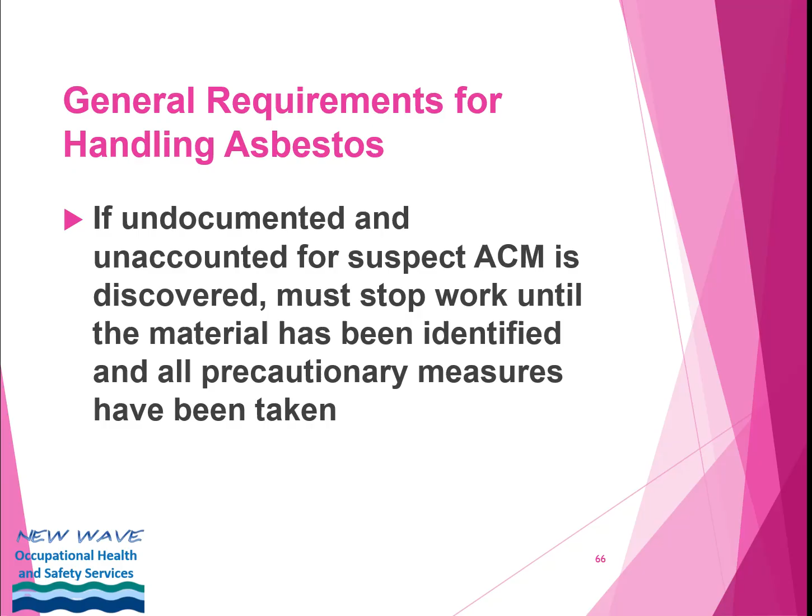Also, when doing asbestos work in a building with a ventilation system, turn off the system and seal the openings till the work is complete. The last thing you want to do is to get asbestos inside the ventilation ducts and machinery.

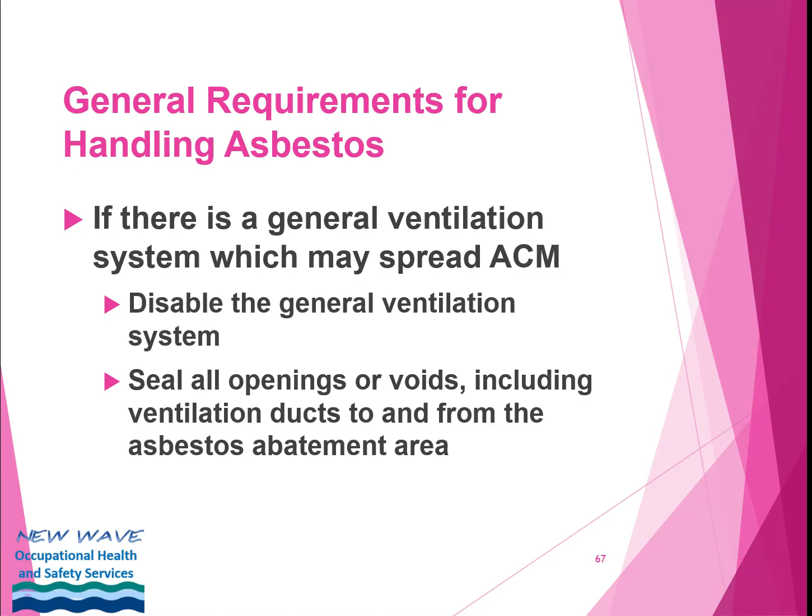Lastly, asbestos activities in general will require a changing and washing area. While this can be a washroom, you must consider the decontamination aspects of this room. Thick plastic drop sheets will also often be used.

And asbestos handling is a very wasteful process. Any drop sheets, barriers, portable enclosures, essentially anything used to contain asbestos, must not be reused unless they are rigid and can be cleaned thoroughly.

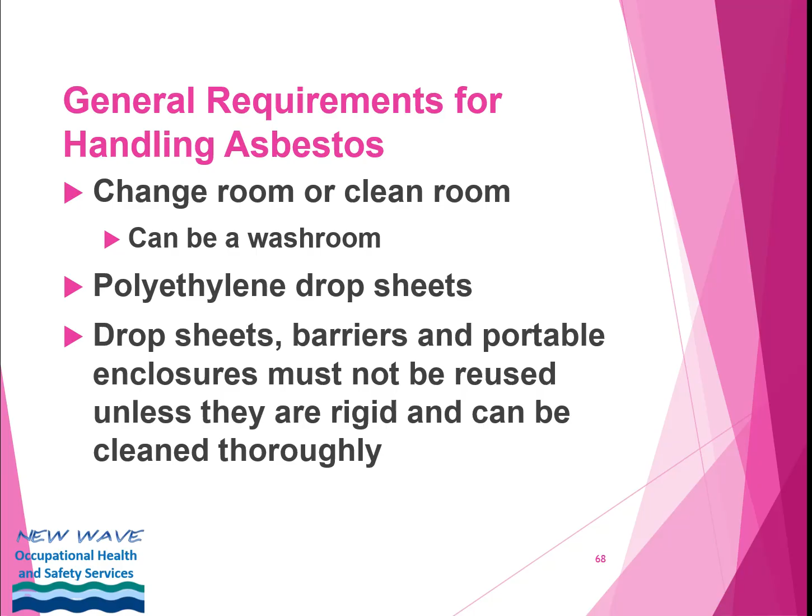Those general rules aside, there are many different ways to classify asbestos work. Ontario uses a Type 1, 2, 3 classification, as does Manitoba and Prince Edward Island. Alberta, British Columbia, Saskatchewan, New Brunswick, and the federal government use a low, moderate, high risk scale. These two systems follow the same idea and differ only in details. The other provinces do not classify asbestos work according to risk.

As this is an awareness course, we will not be getting into the fine details of these classifications. However, for illustration purposes, we will highlight some of the rules from Ontario, as its Type 1, 2, 3 system is widely used. In this way, learners can gain appreciation of the activities and their risk levels.

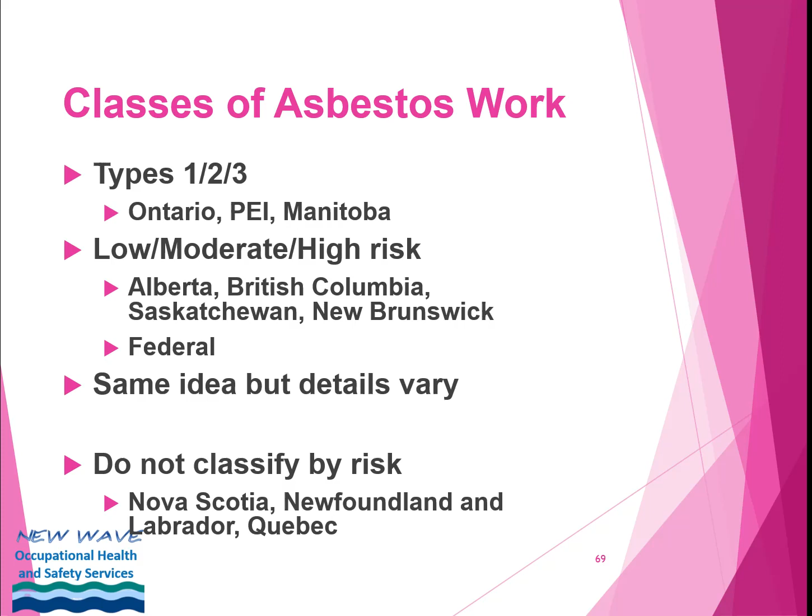To make this discussion more understandable, I want to introduce a new term. The Ontario rules often refer to breaking, cutting, drilling, abrading, grinding, sanding, and vibrating asbestos. To make the following discussion a little easier to follow, I will refer to all of these actions as simply working. And for simplicity, I will refer to asbestos-containing materials as simply asbestos.

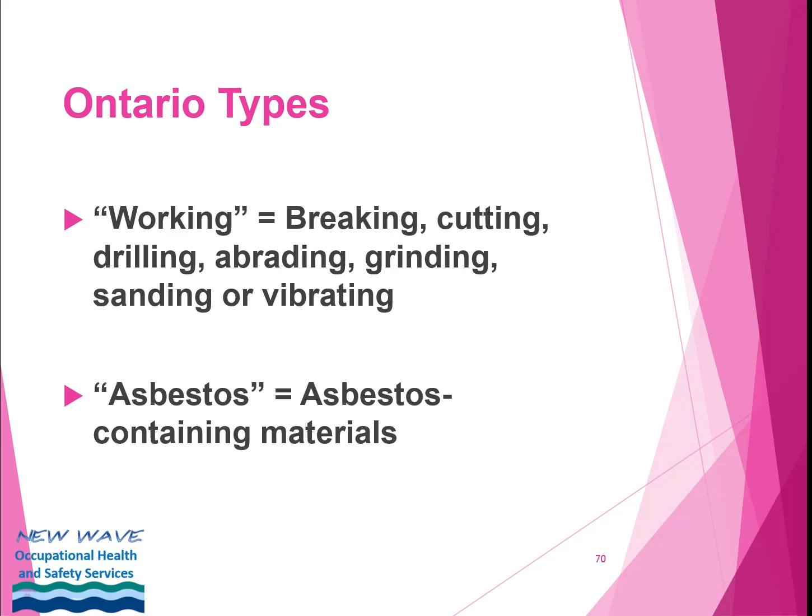Now, Type 1 activities, called low risk in other provinces, have the lowest potential for asbestos exposure. These activities include removing less than 1 square meter of drywall when asbestos joint filling compound was used, or installing or removing less than 1 square meter of friable asbestos ceiling tiles, so long as you do not work them.

Look at other materials other than ceiling tiles. If the asbestos is non-friable, then any amount can be installed or removed, again, so long as you do not work them. And you can work any amount of non-friable asbestos, such as floor tiles, so long as you use non-powered hand tools and wet the material first. All of these activities are Type 1, or low risk.

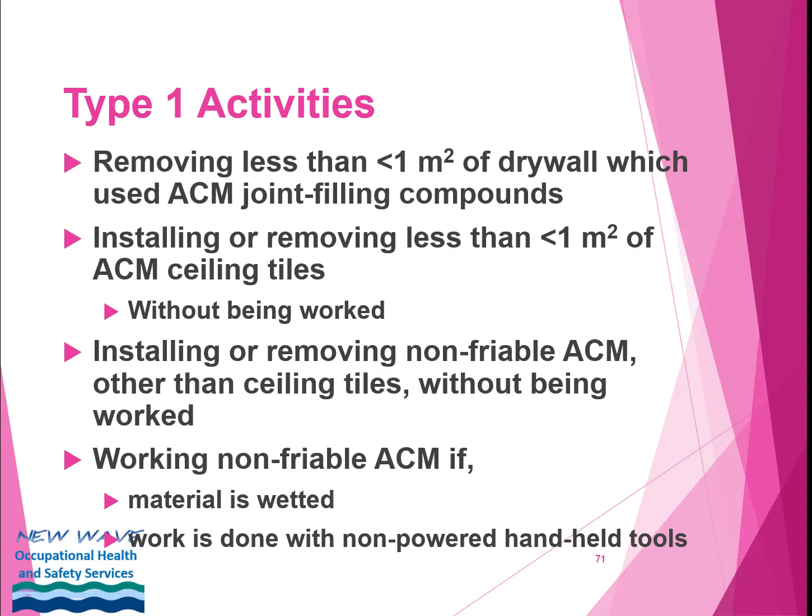Type 2, or moderate risk, is the largest list of activities. Here you can remove or install an unlimited number of ceiling tiles and amount of drywall. It is also here where you can remove false ceilings upon which asbestos may have fallen. For instance, ceilings below girders that have been sprayed with asbestos fire insulation, as small amounts of this insulation often falls off. Type 2 also includes disturbing less than 1 square meter of asbestos during machinery repair.

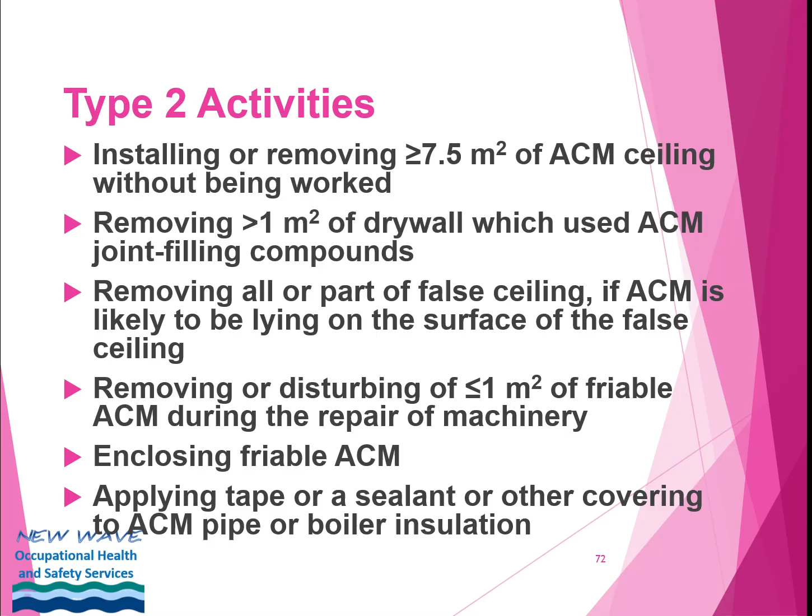And recalling our discussion about asbestos handling options, enclosing friable asbestos or covering asbestos insulation with tape or sealants are also Type 2. In Type 2, you can even work non-friable asbestos, such as asbestos wallboard, so long as you either wet the material and use non-powered hand tools, or use power tools that are attached to HEPA filters.

You can clean or remove air filters that may have trapped asbestos dust, and remove pipe insulation using a glove bag. Lastly, there is a catch-all. Any activity that is not explicitly listed in any type is included in Type 2 by default.

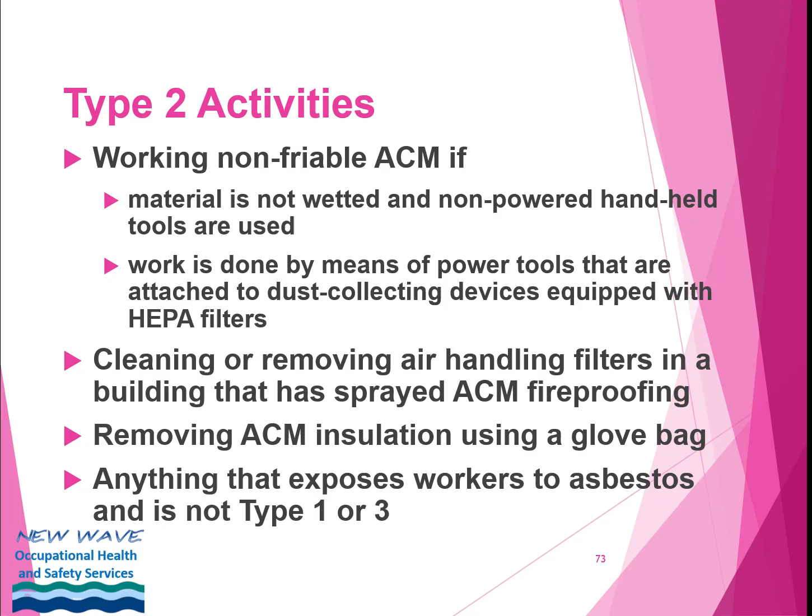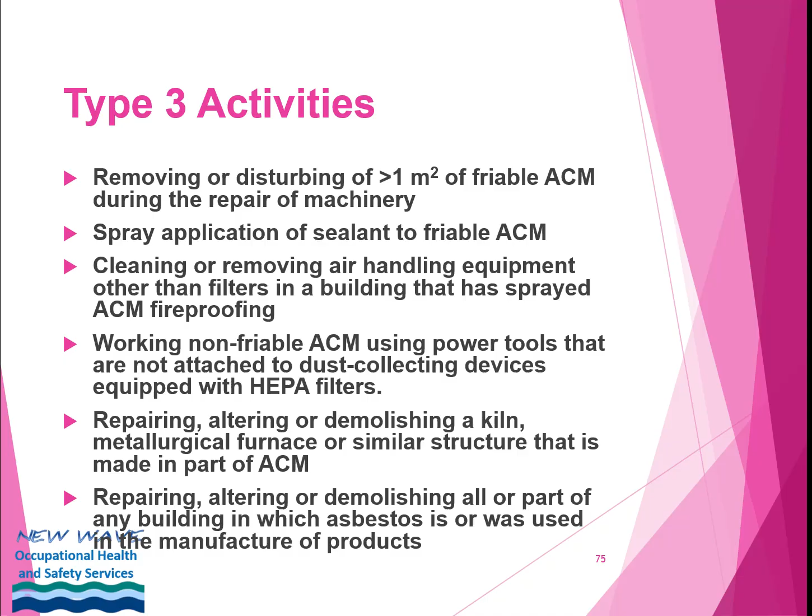Type 3 activities carry the highest risk. Here you can remove any amount of asbestos during repair. You can apply sealants or encapsulants, and you can maintain all parts of air handling equipment that may have been exposed to asbestos. You can use power tools to work the asbestos, even though the tools have no dust collection systems. And you can repair, alter, or demolish buildings or equipment that was used or contained asbestos.

I want to add one note here from my own experience with asbestos removal projects. I've seen contractors quote Type 3 precautions for Type 1 or Type 2 activities. Most commonly, these are removing floor tiles, which is Type 1, or removing drywall, which is Type 2. While the Type 3 procedures are quite safe if followed, they increase the client's costs unnecessarily.

Also, while billing for Type 3 precautions, I've rarely seen contractors build or use these precautions properly. It thus falls on the building owner to be alert to what is needed.

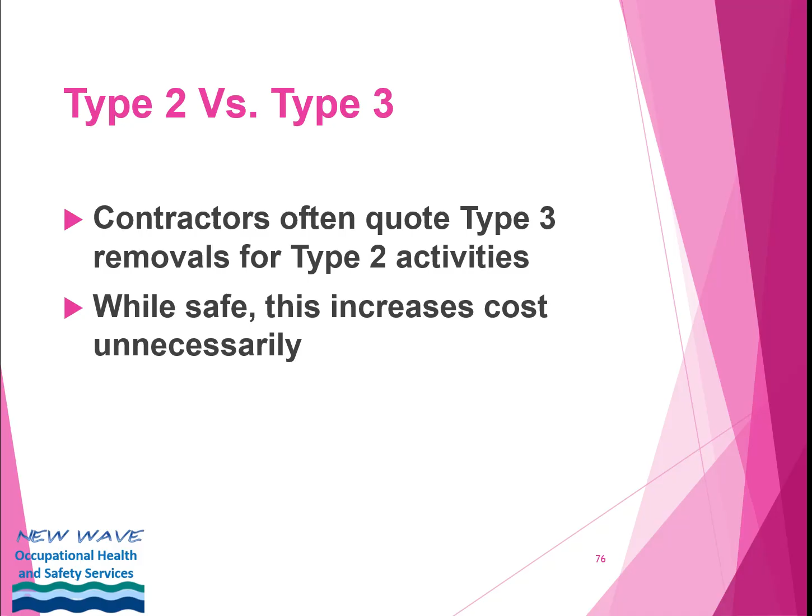We have noted that Type 1 activities are the lowest risk, so what precautions are needed to manage these low risks? Beyond personal protective equipment, which we will discuss in the next module, you will need a water source so that the asbestos can be wetted, and so that workers can wash up afterwards. The workers will also use plastic drop sheets to cover the floor, and need special waste disposal bags. Beyond that, no barriers or containment systems are needed.

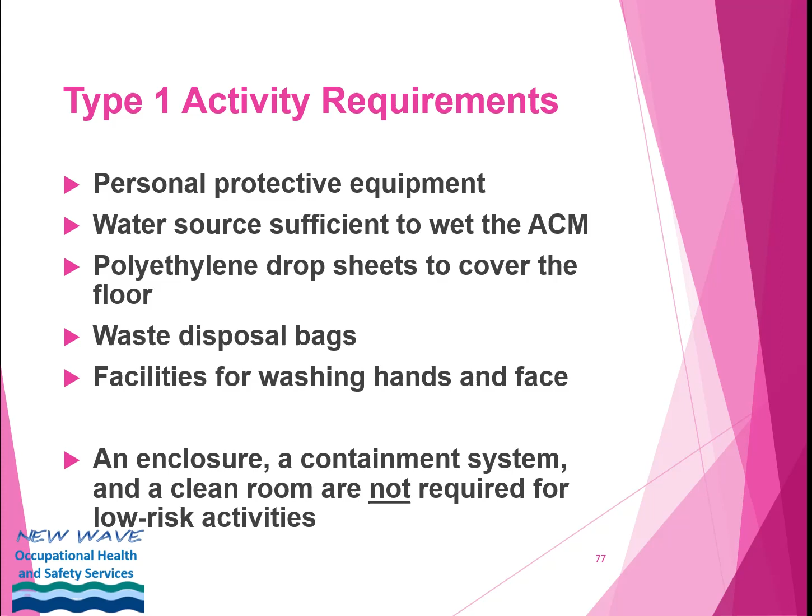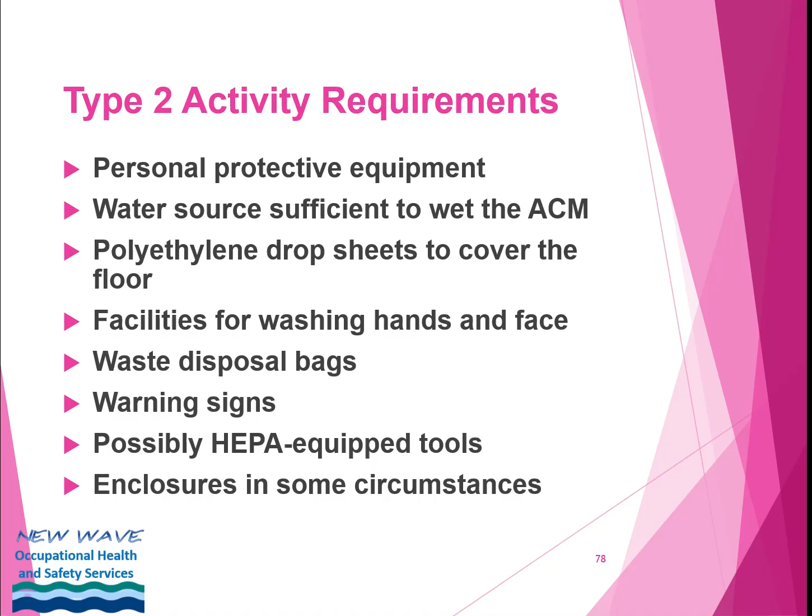Type 2 activities carry on the Type 1 precautions, but add warning signs and possibly HEPA-equipped tools and enclosures. Recalling from our recent discussions that working non-friable asbestos is a Type 2 activity if using power tools that are attached to HEPA filters, this video illustrates what Type 2 precautions actually look like.

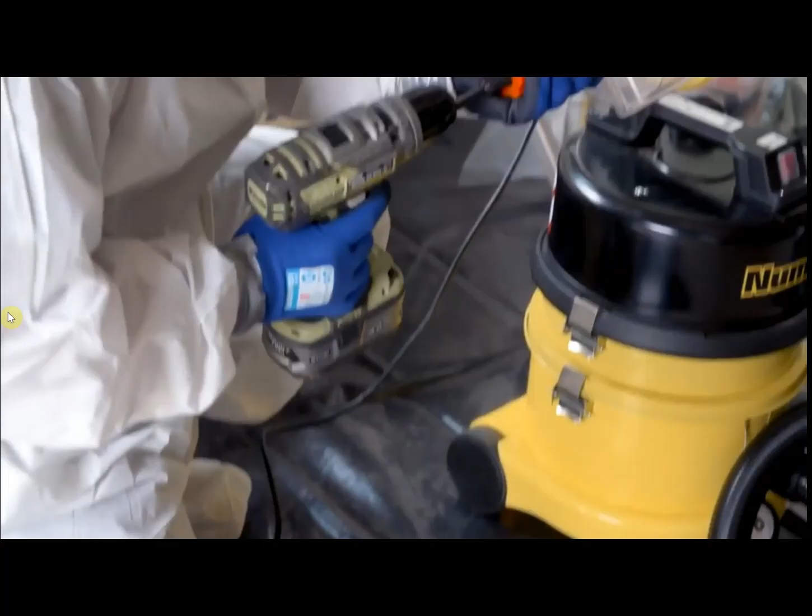If you need to drill into asbestos to run cables or ducting, there are several things you will need before starting work, including a non-powered hand drill or a low-speed battery-powered drill. Battery-powered drills should be fitted with local exhaust ventilation, or LEV, dust control hood wherever possible. Disposable cleaning rags or wet wipes. Wet wipes are used in this video.

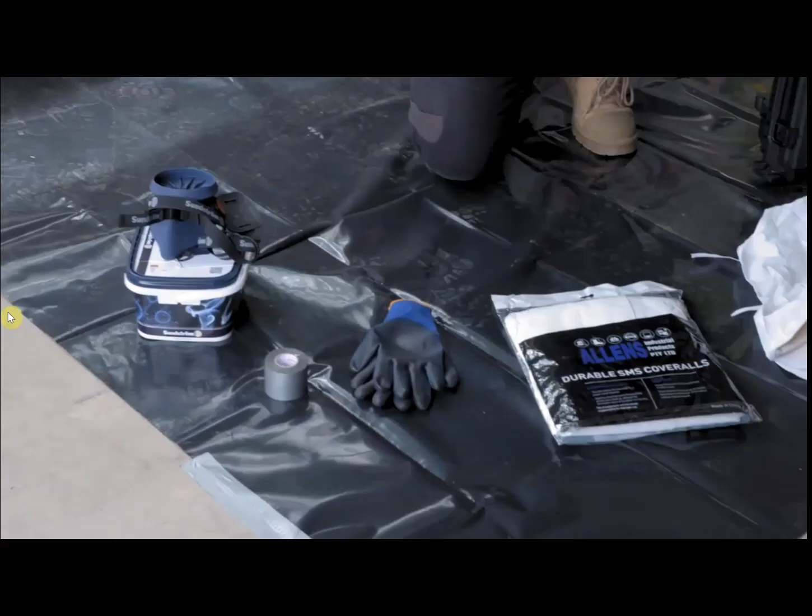A misting spray bottle filled with water. Adhesive duct tape. Sealant. Heavy-duty plastic sheeting, minimum 200 microns thick. Asbestos labelled heavy-duty polyethylene asbestos disposal bags, minimum 200 microns thick. A HEPA filtered H-class industrial vacuum cleaner, and PPE and RPE as described in the PPE video.

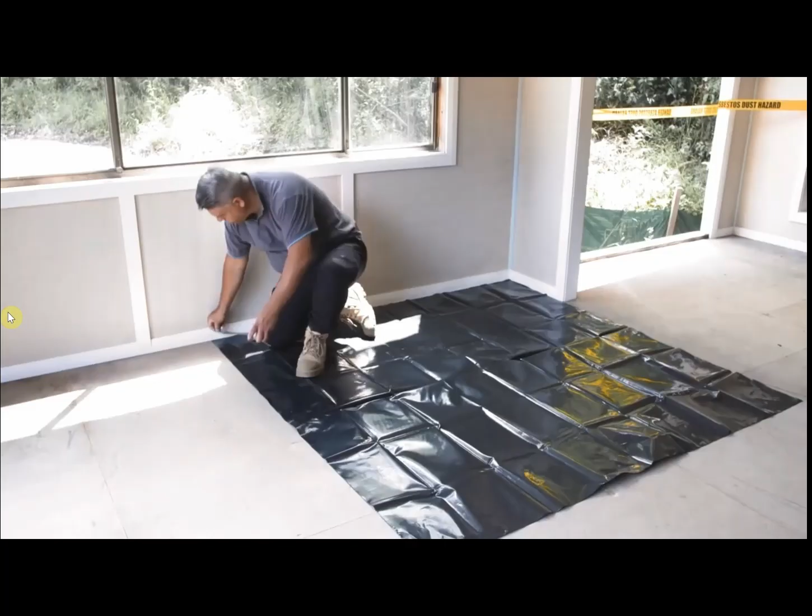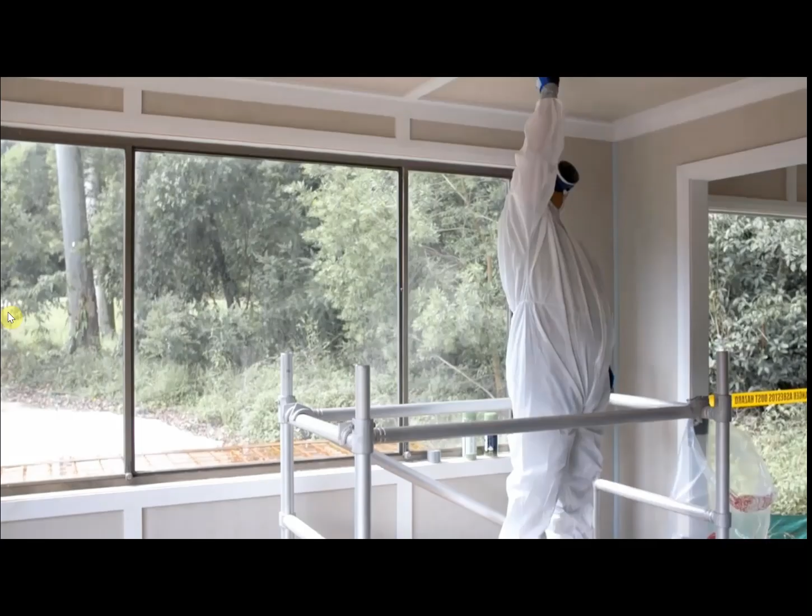Segregate your work area. Tell people you're working there and put up warning signs and barrier tape. Set up the asbestos work area with heavy-duty plastic sheeting to cover any surface that could become contaminated. If drilling outdoors, avoid working in windy environments where asbestos fibres can blow around. If you're drilling a hole into ACM sheeting, tape the point to be drilled and the exit point, if you can, to prevent the edges from crumbling.

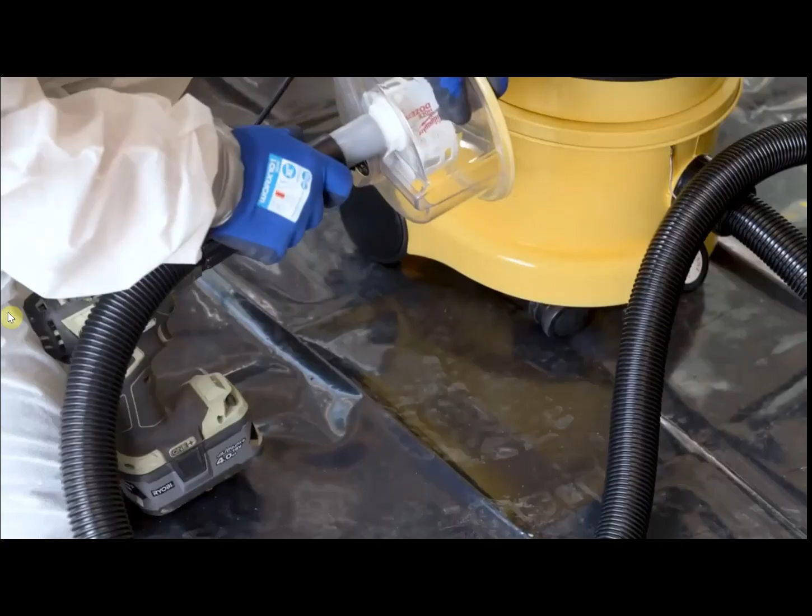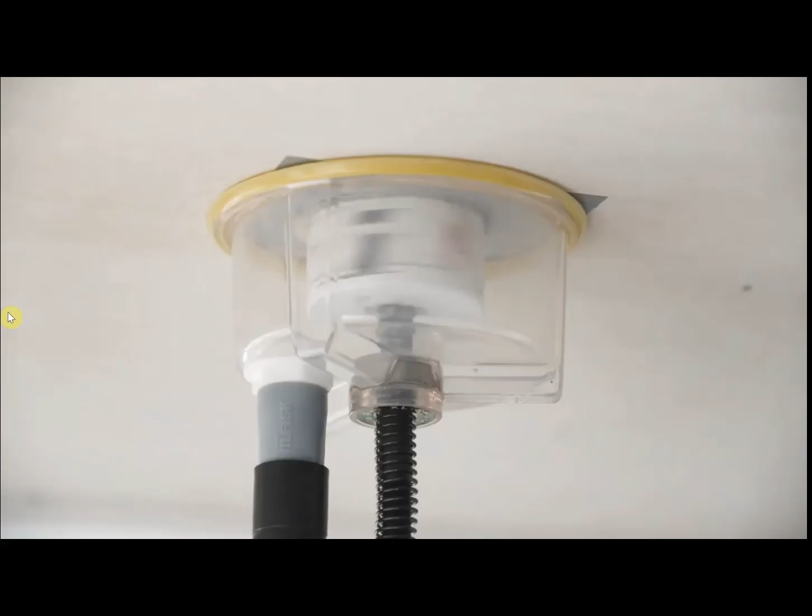Use a low-power drill with local exhaust ventilation. These are reasonably inexpensive and attached to the H-class industrial vacuum cleaner and your drill to prevent the release of asbestos fibres. If you can't get one of these, then shadow vacuuming is the next best option, followed by gels and pastes.

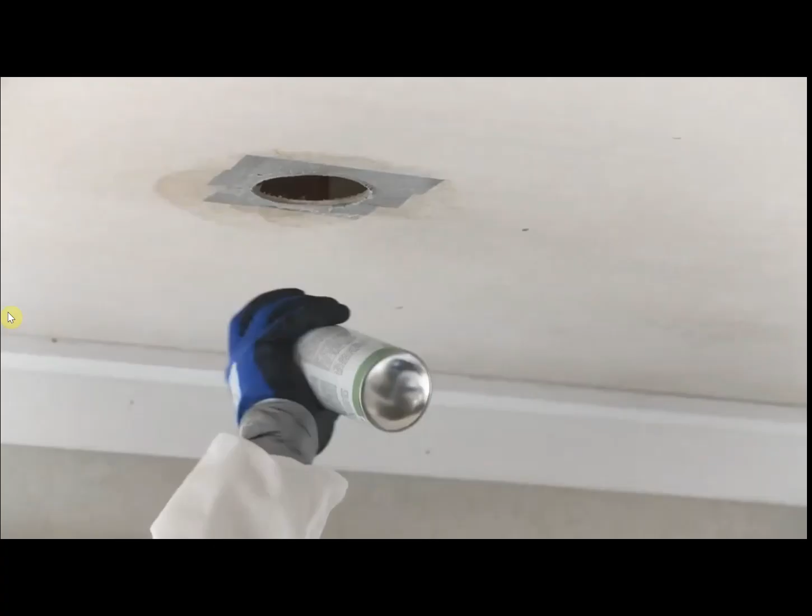Once you have drilled through the tape, use wet wipes to clean off the drill bit and any debris off the wall. Dispose of the wet wipes as asbestos waste, as they will contain asbestos dust and fibres. Seal the edges or where you have cut with the sealant. If you are passing a cable through, insert a sleeve to protect the inner edge of the hole. And that's a quick summary of some of the precautions for Type 2 when drilling a hole using an asbestos material.

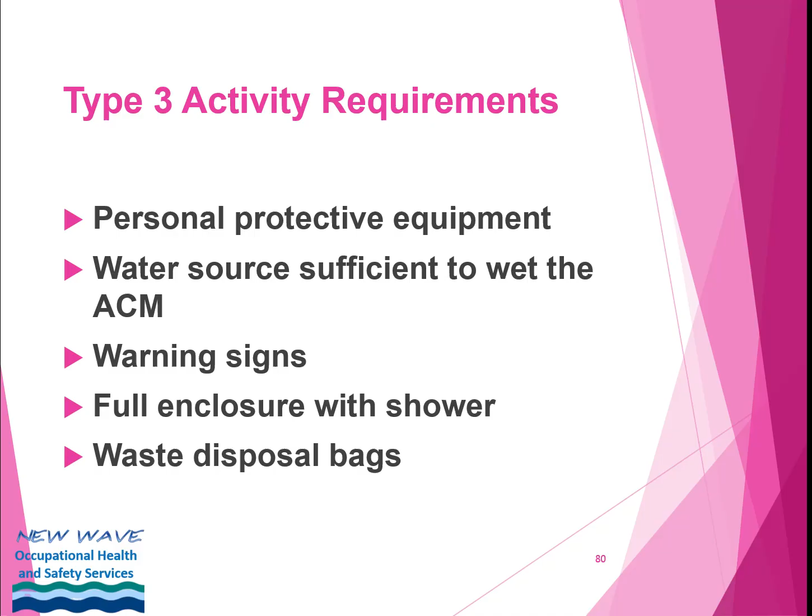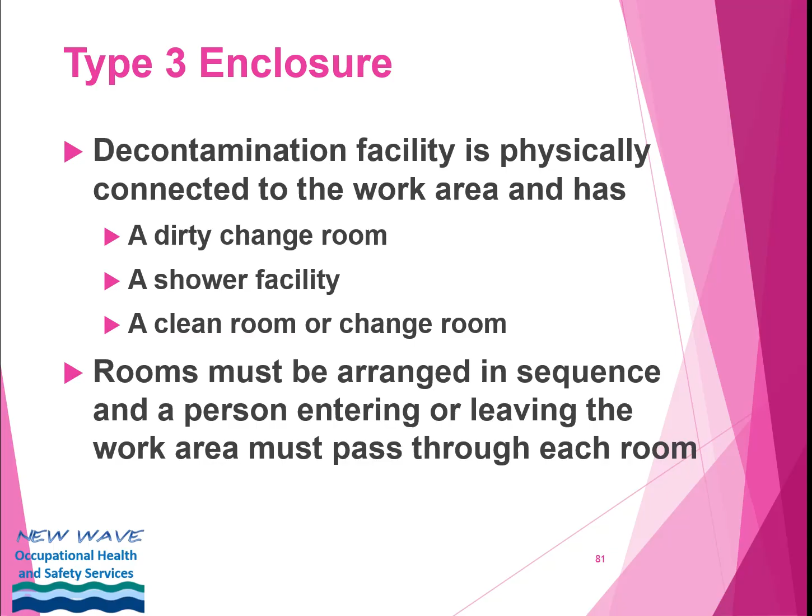Now, Type 3 activities, of course, have the highest risk. They maintain the water and sign requirements, but now require a full enclosure. That enclosure must be physically attached to the work and have 3 separate compartments. One dirty change room where workers can take off their asbestos-contaminated coveralls and other gear. A shower facility in the middle, and a clean room or change room where workers can put on their street clothes. The idea, of course, is that workers would go through all 3 rooms, when entering or leaving the worksite.

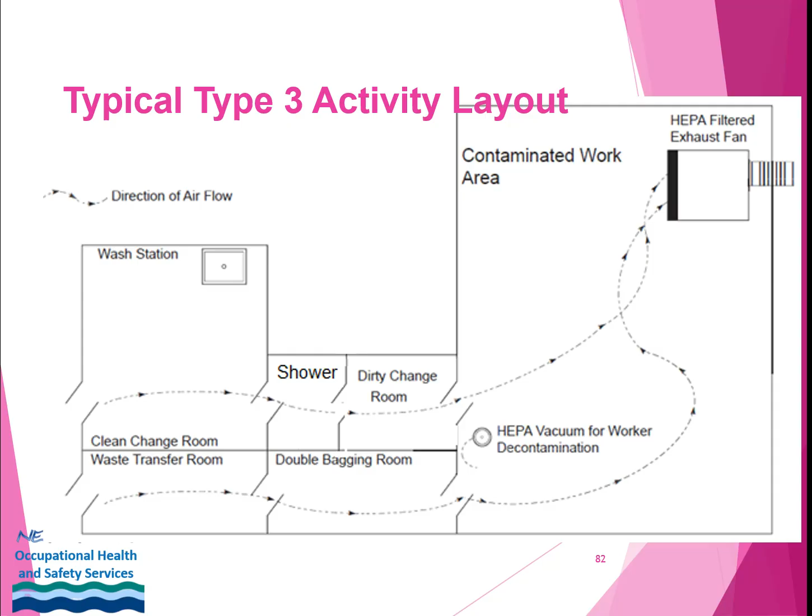This schematic shows what a Type 3 enclosure should look like. You can see the dirty and clean rooms and the shower in the middle, along with a parallel path below those rooms through which the asbestos waste is cleaned and removed. This slide shows what a typical Type 3 asbestos enclosure looks like in practice.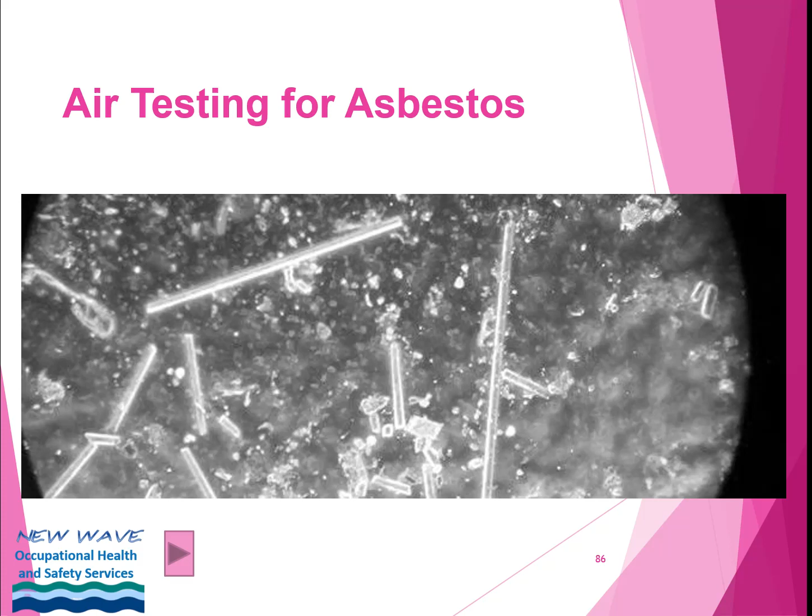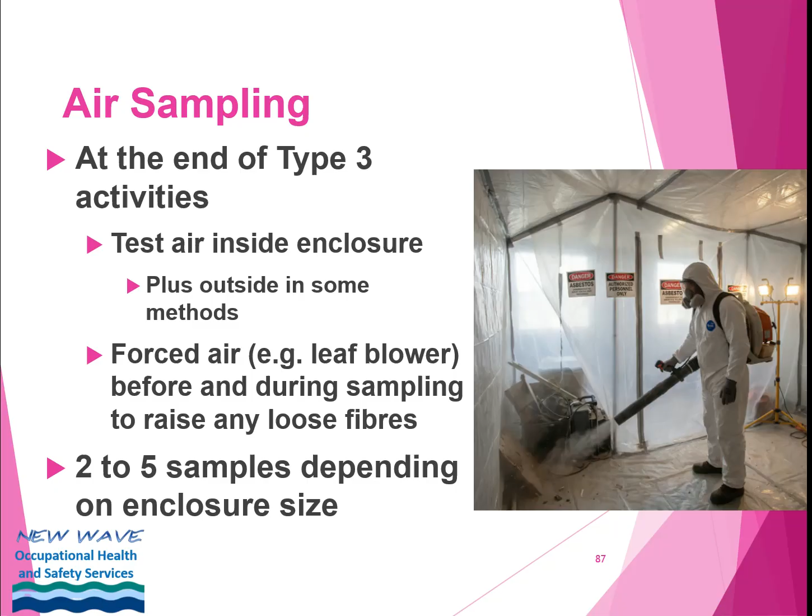In Ontario, the pass mark varies by method. With PCM, the pass mark is 0.01 fibers of asbestos per cubic centimeter of air. For the more sensitive TEM method, the site passes if the asbestos concentration inside the enclosure is less than or equal to the concentration outside. And this concludes our discussion of classes of asbestos work. I invite you now to move to Module 7, where we will discuss personal protective equipment requirements.